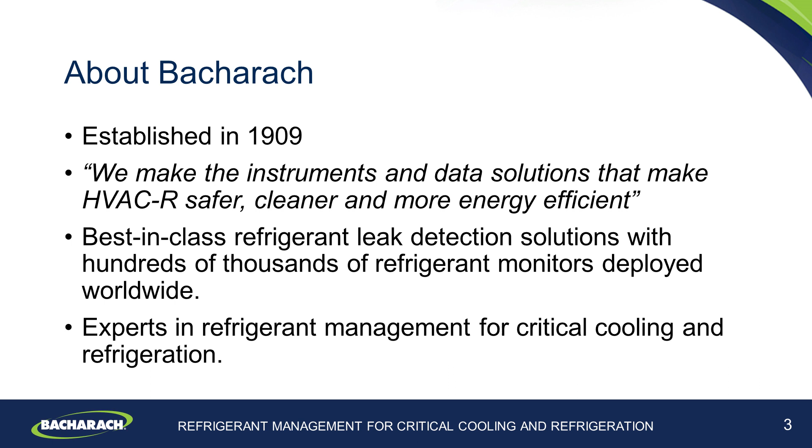So let's get started with this presentation. The basis of the presentation is specifically on the 1st of January, the final revisions to EPA's Section 608 Recycling and Emissions Reduction Program came into effect. Different aspects of the program came into place in 2018 and 2017. Not everything has changed, but here we will walk through the key aspects of the legislation as they stand now, post January 1st, 2019. These are the topics we'll be going into much more depth on the following slides.

Adam, would you give us a brief rundown on what changes now with the EPA 608 after January 2019 on each of these? Yeah, certainly. So on the record-keeping front, this has continued from previous revisions, but the scope of what equipment record-keeping is required for has increased post-2019. Leak rate calculations remain central to compliance, and again, although they haven't changed, we're going to go over them here just to make sure that's thoroughly understood by the audience. Equipment leak thresholds define when actions are required on appliances, so a deep understanding of that is key, and these have also reduced post 1st of January.

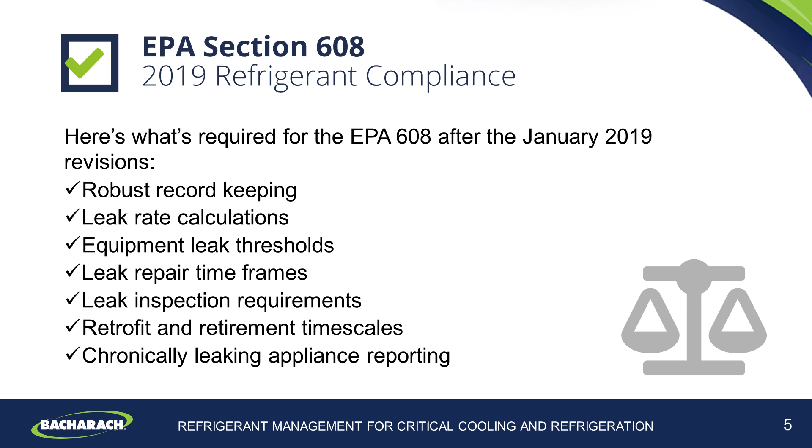The leak repair timeframes, leak inspection requirements, and retrofit and retirement timescales all remain some of the critical areas of compliance for equipment. It's really important that the right actions are done in time. This is central to compliance, and so we'll go into some detail explaining these. And lastly, brand new for 2019 is the requirement to report annually to the EPA on chronically leaking appliances, and so we'll explain what that means too.

Number 1, robust record keeping. Record keeping is the number one responsibility for equipment owners and operators. Records are the means of proving that the regulations have been followed, and the EPA clearly assigns a responsibility for record keeping of operational equipment on the equipment owners or operators. As we highlight here, asset maintenance and operational records are required for all equipment with over 50 pounds of Class 1, Class 2, or non-exempt substitute refrigerants. We'll clarify those in just a moment.

And a far lower size threshold exists for refrigerant removal. Refrigerant removal records are required whenever refrigerant is removed from any appliance with only 5 or more pounds of refrigerant. All records must be kept for a minimum of 3 years. So, when are the records required? Records are required whenever an appliance, a refrigeration circuit, is maintained, serviced, repaired, or disposed of. And so that includes doing inspections, adding refrigerant, doing a repair on that appliance, as well as, of course, any retrofit or retirement activities as well.

Great, thank you, Adam. What type of records do we have to keep? So if the EPA come to inspect, they will ask you to be able to identify and locate all of your refrigeration equipment. You'll need to know what the full charge size is, any dates that any work was carried out, any parts or components of the equipment that were worked on, the type of work, was it a repair, so on and so forth, who carried it out, if refrigerant is added, what refrigerant and how much, and whenever you add refrigerant, the leak rate must be recalculated, but we'll come on to that in just a moment.

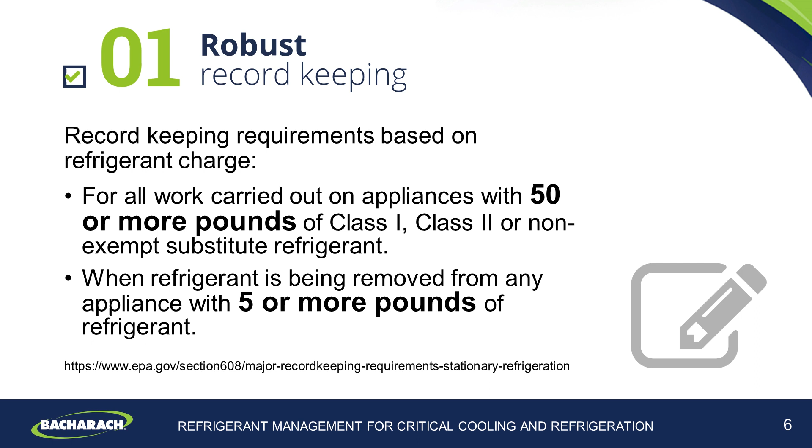And just to clarify which refrigerants are covered by this, as I mentioned before, it's Class 1, Class 2, and the non-exempt substitutes. Class 1 are the very high ozone-depleting refrigerants, like the CFCs. Class 2 are the still relatively high global warming potential, but also with ozone depletion potential refrigerants like the HCFCs, for instance, R22. And then the non-exempt substitutes would be your HFCs and HFOs, which have no ozone depletion potential, but have mid to high global warming potential.

What you don't need to keep records on are the exempt substitutes, such as the natural refrigerants like CO2, ammonia, propane, isobutane, and those types, which have no ozone depletion potential and very, very low global warming potential.

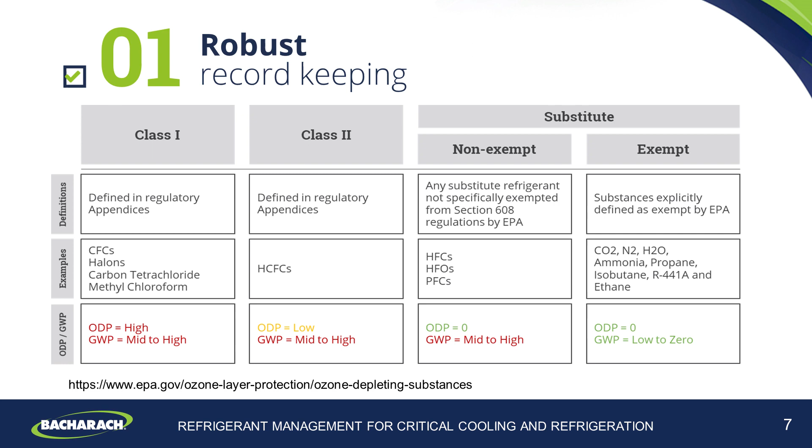So for the second part of our checkpoint here, let's get into the leak rate calculations. We have here up on the screen two different ways to calculate it. There's an annualizing method and a rolling average method. We find most people tend to use the rolling average method. And so Adam, could you explain the rolling average method and then maybe perhaps go through an example?

Sure. So it's just much clearer and simpler than the annualizing method, and so we recommend using that. The EPA simply state that the same method must be used for all appliances across your record keeping. So whichever one you do choose, just make sure you're consistent. And also the leak rate must be calculated every time refrigerant is added or removed from the appliance.

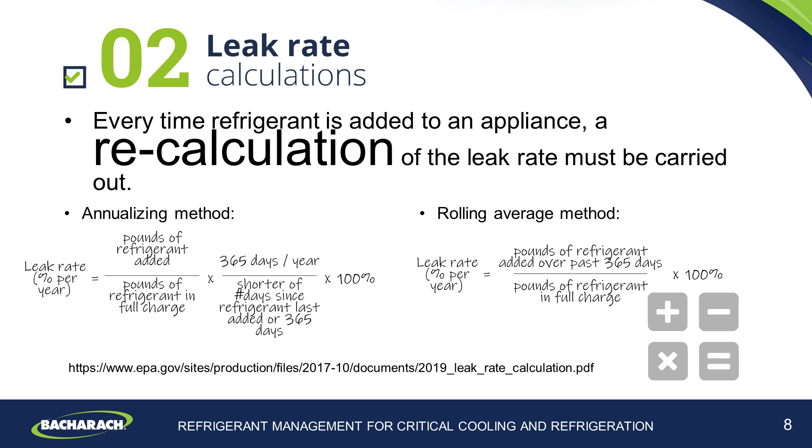So the rolling leak rate simply takes the amount of refrigerant added over the last 365 days for your appliance and divides it by the amount of refrigerant in the full charge. Multiplying by 100 gives you the percentage. So ultimately, in the example, if you have a full charge of 2,400 pounds and over the last 365 days you've added 200, that's a leak rate of 8.3%.

Now that 200 pounds might be just one addition, or it might be multiple additions that sum up to that 200 pounds. The key thing is you're taking the total amount that has been added over the last 365 days. And hopefully that makes that clear. Thanks.

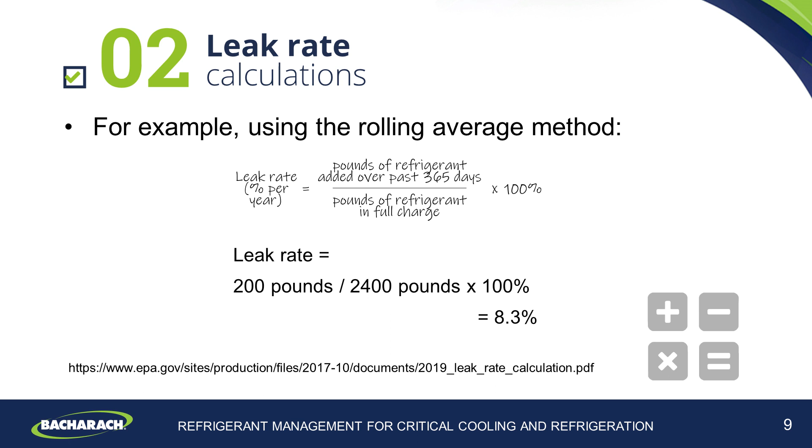So for point 3 of our checklist, let's get into the equipment leak thresholds. Starting January 1st this year, the thresholds have reduced, and it depends on which category. So for industrial process refrigeration, the threshold was 35%. It's now down to 30%. For commercial refrigeration equipment, we've gone from 35 down to 20, which is a big drop. And comfort cooling appliances went from 15 down to 10%.

And again, this is the annual rolling leak rate, and the EPA refers to it as the applicable allowable leak rate. So if you exceed this, it doesn't mean you're non-compliant, but it does mean there's some extra things you need to do. Adam, can you explain this in a little more detail for us?

Yeah, absolutely. So what it does mean is that for all equipment that exceeds its applicable allowable leak rate, actions must be taken to bring the leak rates below these levels. In particular, locating the leaks, repairing them, and verifying that these repairs and ongoing inspections are complete. And we will go into those in our later checkpoints in more detail.

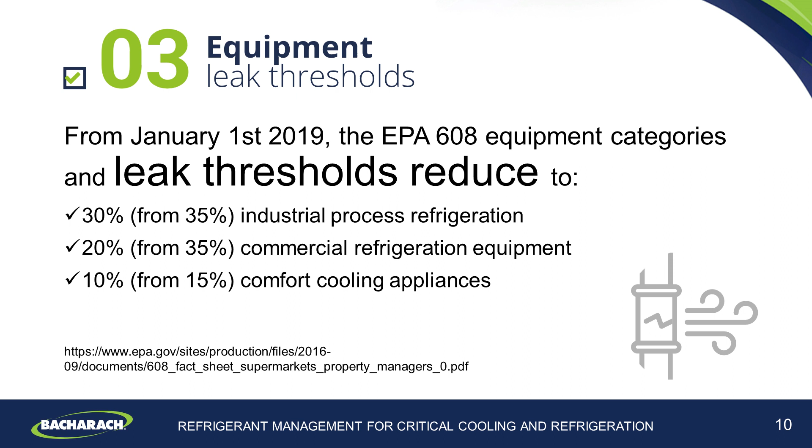Now, these actions will need to be completed until it can be demonstrated that the annual leak rate can be shown to be under its threshold for a total of 12 months. A further point just to notice on this is that if an appliance falls into neither of these three categories here, it would be categorized as other, and anything that falls into that category, the 10% leak rate applies.

For point 4 of our checklist, let's look at the leak repair timeframes. Just for clarity, these have not changed as of January 1st, 2019, but we want to go over them to make sure everyone's up to speed. So it's 30 days for commercial applications, or 120 days for industrial process refrigeration. You can have extensions to these when certain criteria are met. Adam, could you explain what criteria would get you an extension?

The EPA specify 3 criteria, one of which would need to apply to get an extension. The first is the appliance is located in an area subject to radiological contamination, or shutting down the appliance would lead to a risk of that.

The second is that requirements of other regulations make a repair within this time frame impossible. Or thirdly, components that must be replaced as part of the repair are not available within the 30 or 120-day time frame. If you are applying for an extension, there are specific documentation requirements that you need to cover, and you must submit this request to the EPA before your 30 or 120 days is up. You are at that point, however, welcome to assume that the extension has been granted unless the EPA gets back to you.

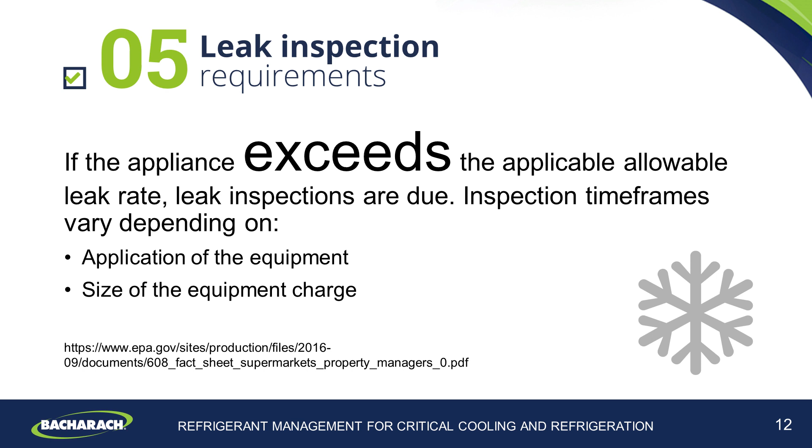For point 5 on our checklist, let's get into the leak inspection requirements. As we discussed earlier, if the appliance actually exceeds its allowable leak rate, then we need to get into some additional requirements, and these requirements are inspections. We'll have different inspections depending on what type of equipment it is and also the size of the charge in the equipment.

So the inspections are required until you can demonstrate that the rolling leak rate is under its threshold for a total of 12 months, which means that if you had one big addition, let's say in January, the leak rate wouldn't drop below that threshold until the following January, and you still then have to demonstrate that it's been below that for another 12 months. So ultimately, these inspections are going to be for a 2-year cycle.

However, you can actually avoid the need to do quarterly or annual leak inspections if you have installed an annually calibrated automatic leak detection system, such as the Bacharach MZ, that continuously monitors and samples for refrigerant leaks. A key element here is that the equipment must be able to detect a concentration level of 10 parts per million or lower. Great, thank you.

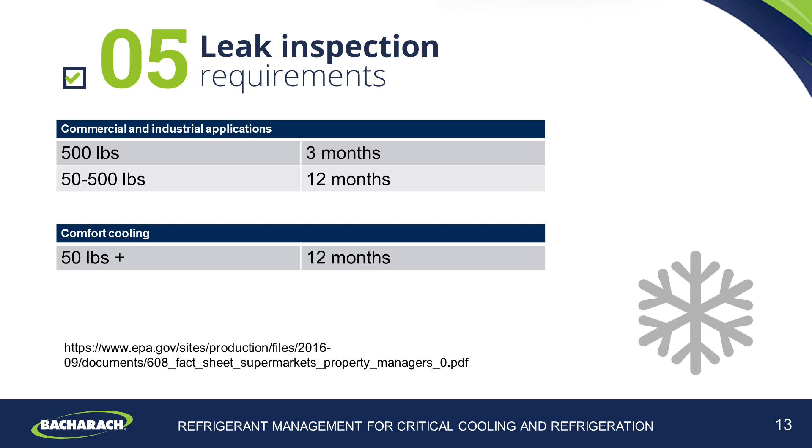For point 6, let's cover the retrofit and retirement timeframes. As we mentioned, sometimes the equipment is exceeding its allowable leak threshold, and for that you need to apply a repair, and in some cases a repair doesn't fix the equipment. It doesn't come under its allowable threshold, in which case we need to discuss retrofitting or retiring this equipment, and the EPA covers this in quite a bit more detail. Adam, could you go into the specifics on this?

Yeah, so there are 3 key steps to the process. Firstly is documenting the decision to retrofit or retire your equipment. Then the submission of a plan, and then acting on that plan. So for example, retrofitting will involve removing refrigerant, making any modifications to the equipment, and then the addition of the new, different refrigerant that falls into the substitute refrigerant section that we discussed earlier.

On the retiring front, that will involve removing refrigerant and the documentation on that, as well as the documentation of the decommission and removal of the appliance and who that went to. Is there a time frame we have to hold to here? Yeah, absolutely. So documenting the decision must be made within the repair time frame, which was the 30 or 120 days we just discussed.

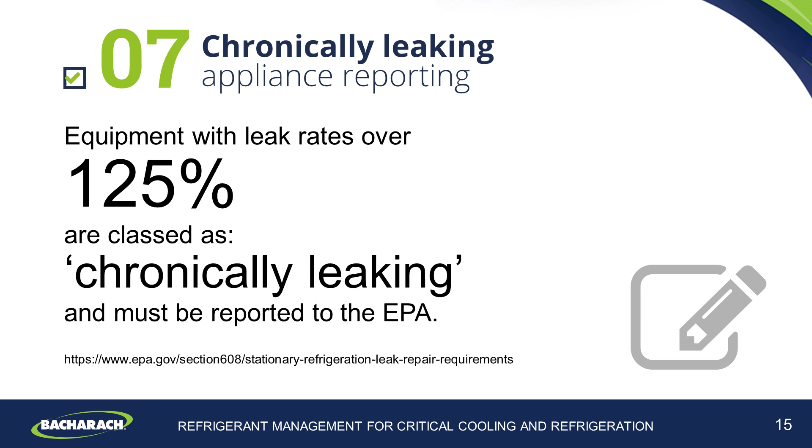That's right, yeah. You need to deliver it before March the 1st of the following year. And it needs to detail the efforts and actions that you are taking to repair this appliance in particular. Got it. That makes sense.

So that concludes our discussion of the EPA Section 608 checklist, where we went into some detail on the specifics of what the EPA requires, specifically what changed for 2019, coming into effect this past January 1st. The links that were in those slides to the EPA are listed on this webpage. Feel free to click on them and get more detail about what the EPA requires on each of these points.